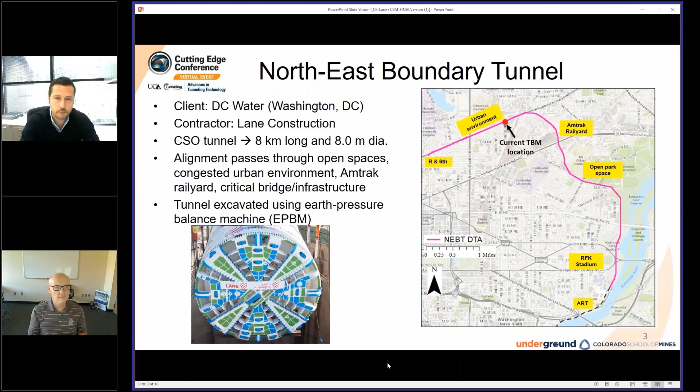Thank you, Karen. Good morning, everyone. Most of you are familiar with the Northeast Boundary Tunnel. The project is in Washington, D.C., and our client is DC Water Clean River. We are Lane Construction. We've been working with the Colorado School of Mines on the project of artificial intelligence applied to tunnel boring machines. And today we're going to talk about that.

This project is 8 kilometers long. You can see that the TBM currently is at 75% of its drive. We pass through some sensitive structures like Amtrak, CSX, WMATA, and other bridges. It is an EPB machine and has been doing the excavation for approximately the last 15 months.

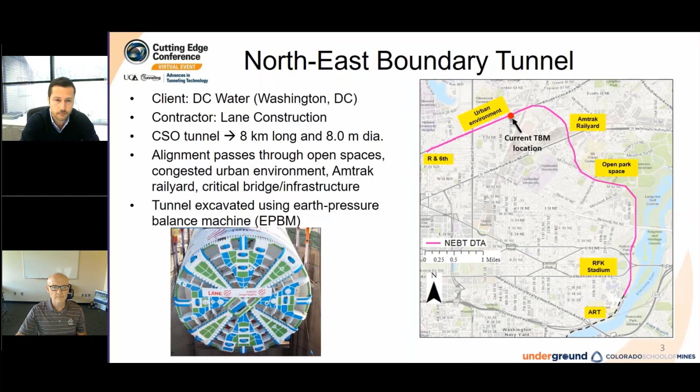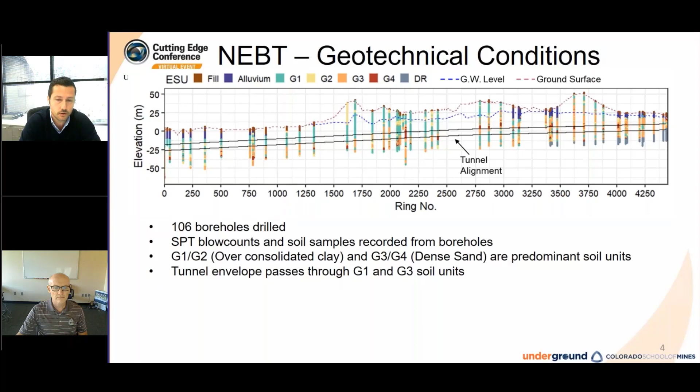Next slide, please. So the geotechnical condition of the alignment started with investigation pre-RFP, and the GBR was characterized by all these boreholes and the SPT blow counts and all the samples. But at the end of the day, we are simplifying things and saying that we are talking about two main soil groups: G1 and G2, which we can represent as over-consolidated clay, and G3 and G4, which we simplify by calling dense sand.

So most of the alignment, let's say 2/3 of it, is in those dense clays, and 1/3, which is what we are mining in right now, is in those sands. The sand is under pressurized water, we are encountering water, and therefore it's very important to apply pressure and to mine in a controlled way. Next slide.

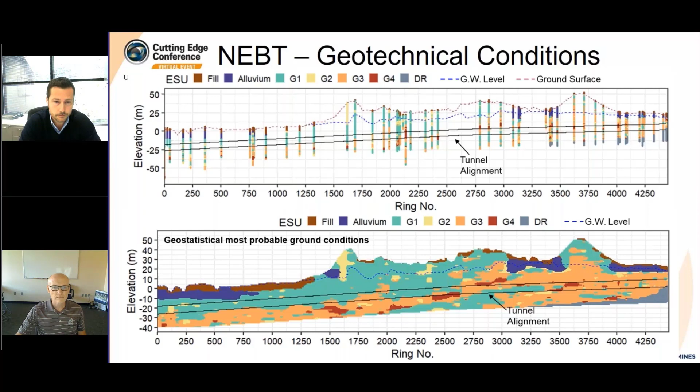So we started working with the Colorado School of Mines, and in our project of artificial intelligence, the first question that we asked ourselves is, what do we want to focus on? What are the bigger risks of the TBM that we want to model, control, and predict with this project? And the result of this discussion was, let's focus on the tool wear, because mechanical damage and potentially catastrophic damage on the TBM can be a very big issue.

So we want to try to have a model that is going to predict the tool wear and allow us to make a good decision where we need to do an intervention, when we have to anticipate an intervention or postpone an intervention if it's needed. At the end of the day, we want to avoid a bigger issue with a TBM stuck somewhere, or with a mechanical failure, or potentially having to have a rescue shaft in a place where we really don't want one. So that is something that we want to avoid.

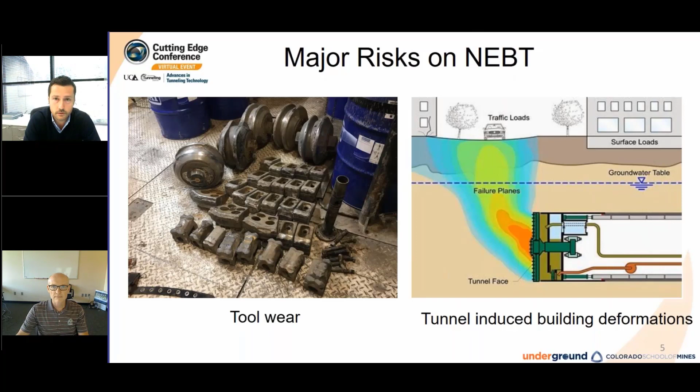And the second thing we're going to focus on is the settlement. Of course, creating settlement is something we don't want to do, and minimization of the settlement is one of the targets that we have here. So we're going to describe the model that we have implemented to try to predict that settlement. And with that, I'll turn it over to Mike, who is going to talk about these two items.

Thanks, Daniele. So we have applied AI successfully in tunneling. We applied this to the Seattle NorthLink Extension project in Seattle, of course, to detect and characterize the as-encountered ground by the TBM. As we all know, with EPB TBMs you cannot see the ground, and so you have to rely on looking at the muck to characterize the ground. We felt the TBM could act as a probe drill and that its performance is impacted, of course, by the ground. So why not use that data to essentially treat it as a sensing TBM?

So the way we did this was we trained an AI model using the TBM data and the borehole logs. The borehole logs exist prior to the excavation, and the TBM data is collected while excavating. So we train that model as we go, and then we predict the soil within the excavated envelope through which the tunnel boring machine moves.

So here you see the geological profile for the Seattle area, a lot of glacial soil, so very heterogeneous ground. The colors designate different soil units. And then you see the traverse of the alignment of the TBM. What you see here then is if we simply pull out the GBR estimated soil profile, this is what you see: clay, sand, silts throughout the alignment.

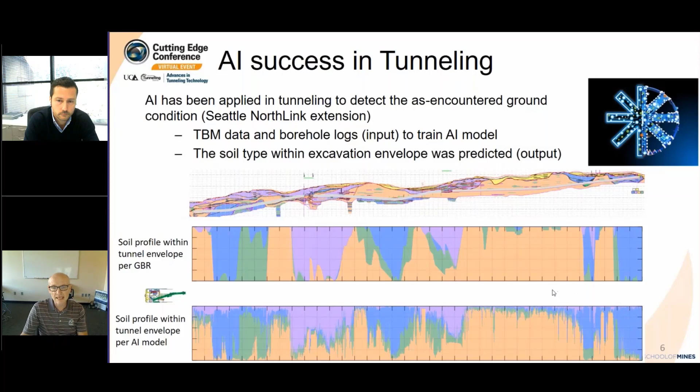So now if we turn our attention to tool wear, there's no continuous measurement of soft ground tool wear. There are disc cutter measurements, but that's hard rock tooling. There's none for rippers and scrapers. We simply don't have a technology yet that allows us to measure that. And as Daniele said, tool wear is quite critical. So we'd really like to get an estimate of what the rate of tool wear is.

So we only get measurements during these limited cutter head interventions, and cutter head interventions in soft ground, pressure balanced conditions in urban environments are a big expense and they're risky. And so they're very limited, and you try to avoid them if you don't have to do it.

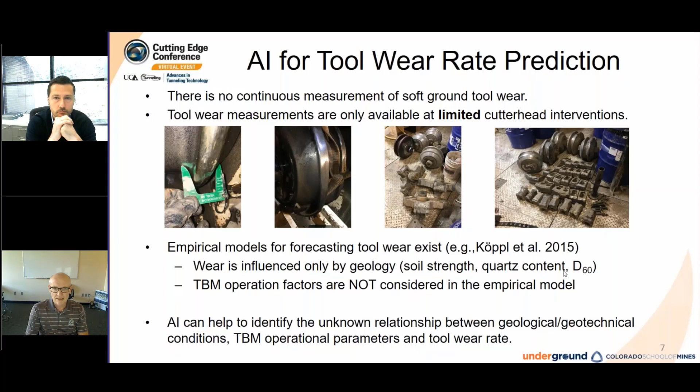There are empirical models for forecasting tool wear, but these models are predicting tool wear only based on geology, soil strength, quartz content, D60, which all leads to items like the soil abrasivity index. The TBM operating parameters are not considered in these prediction models. We believe they should be, but there's just lack of data to develop these models. So we felt that AI can help us identify these unknown relationships, specific to a project, between the geological and geotechnical conditions or parameters, the TBM operating parameters, and then the tool wear rate.

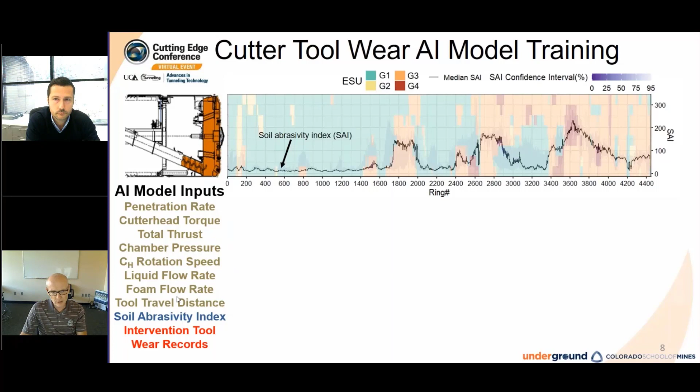So we take this now to train a model. We're going to use inputs from the TBM. So we use the penetration rate, the cutter head torque, the total thrust. These are parameters we believe have an influence on tool wear. And there's some other parameters shown there. We also take the soil abrasivity index and its variability, and we use intervention tool wear records to train the model.

So you see now in red, we have intervention tool records, I1 through I7, as shown on here. Project is somewhere up here where my mouse is. And so you see that these are very sparse interventions, but for each one of these interventions, we have a record of observed wear. So on the bottom here, you see with a picture of the cutter head, the 8 ripper tools that are monitored. And then in the box here, you see the observed wear.

So for example, tool 1 is shown over here with 50% wear. That tool then gets replaced because it has 50% wear. And you see in this particular intervention number 7, all of the tools exhibited 50 to 60% wear and were replaced. And 50% wear, for point of reference, is about ½ an inch or 12 millimeters of wear. So with this data, we trained the model.

I'm going to walk you through one example where we train the model over all the data up through intervention 6. That includes all the geotechnical data, soil abrasivity index, as measured TBM parameters, and intervention data. And then we're going to predict the tool wear beginning from after intervention 6 through intervention 7 and compare with the results.

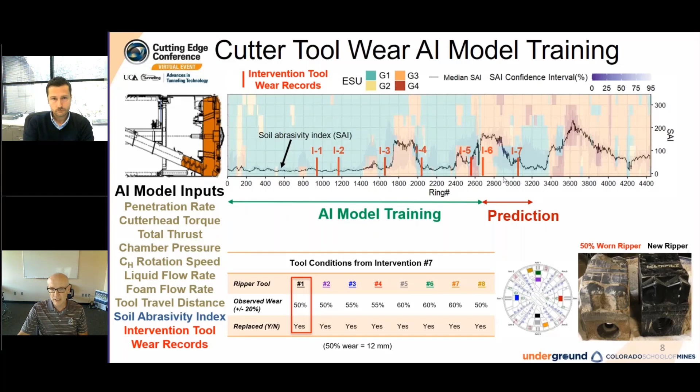I'm just going to jump back here and show that. So between I6 and I7, you see now the TBM is almost fully in the more abrasive sandy soils, whereas prior to that, it was in mostly fine grain. So the model's being trained on a lot of fine grain data. There were some areas where it was experiencing coarse grained soil. We felt like maybe that would be captured adequately between I3 and I4, for example. But as it turns out, it wasn't sufficient enough. So that's one reason for the differentiation.

TBM parameters were also different, specifically higher thrust on the TBM, higher torque on the TBM between I6 and I7, and its influence on wear was not adequately being captured by the model because it hadn't encountered that ground. So one important lesson from these models is they're only as good as the data. They cannot predict outside the range of the data.

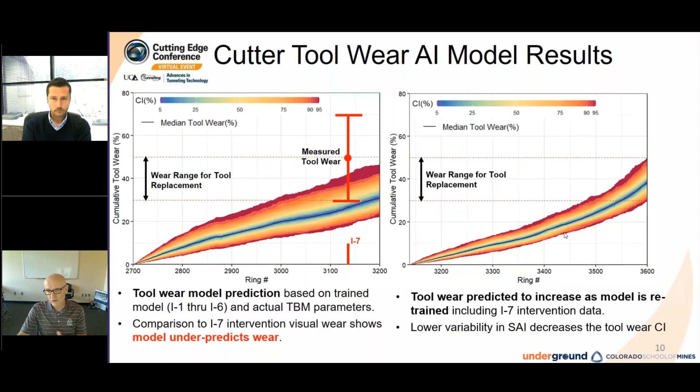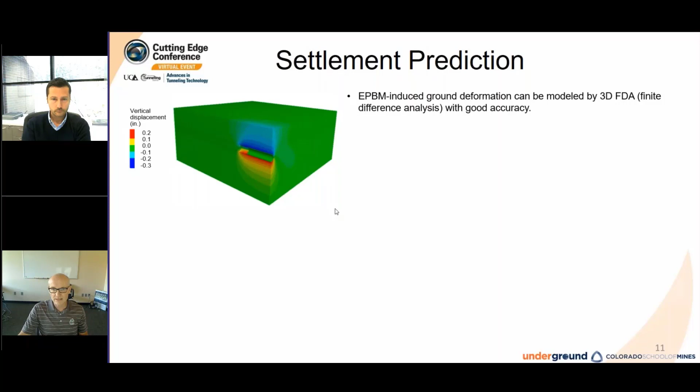All right, switching gears now to prediction of settlement. So the TBM-induced ground deformation can be modeled by three-dimensional computational modeling, finite element or finite difference analysis, with good accuracy. So here you see a simulation of this step-by-step modeling of deformation. We actually introduce into the computational modeling the TBM parameters. So there are face pressures, there are grout pressures that are specified along stretches of the project. Those are critically important to predicting the correct greenfield deformation, so we input those.

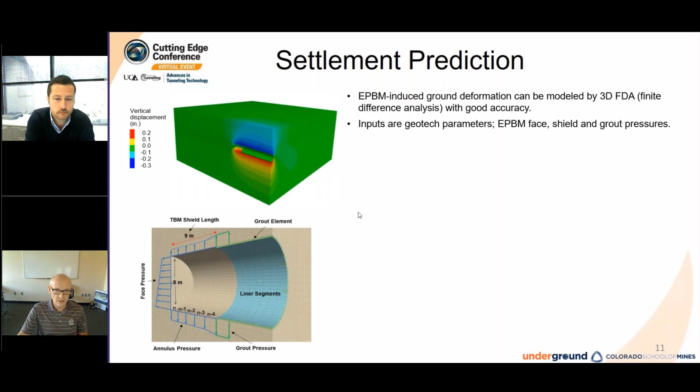And we found on the project that we have matched the observed greenfield surface displacement profiles quite well using this computational model. So here you see a lot of great instrumentation and data points for greenfield ground deformation. And if you look over here on the right, you see the measured surface settlements and predicted surface settlements line up pretty well on a one-to-one line, which tells us we're modeling accurately using this 3D model.

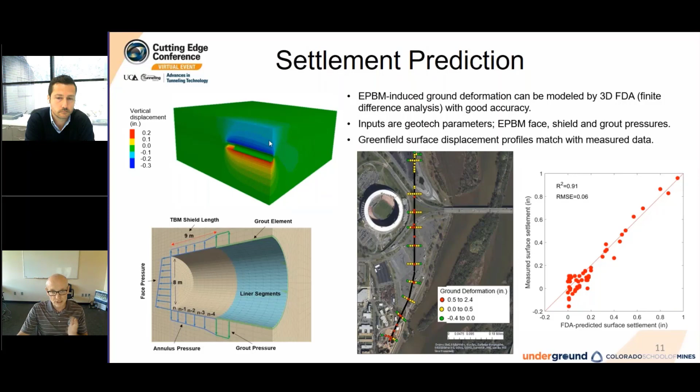But here's the problem. 3D modeling is complicated and computationally expensive. It takes 2 hours for a single run. So this makes the process of predicting ahead or predicting in real time using construction timescales difficult. The whole point of this is to use this as a risk mitigation tool, to be able to predict the next ring, to predict the next shift. And so we need something quicker.

So the strategy here was let's train an AI settlement prediction model using all of the simulations. And if the simulations are accurate based on our ground truthing with actual data, then we could feel confident in our AI model. So we trained the AI model using hundreds of simulations, varying geology that we anticipated on the project from the data, varying geotechnical parameters, and varying TBM parameters, specifically face pressure and grout pressure. So we have lots of input. In fact, we have 16 input variables into 800 of these simulations.

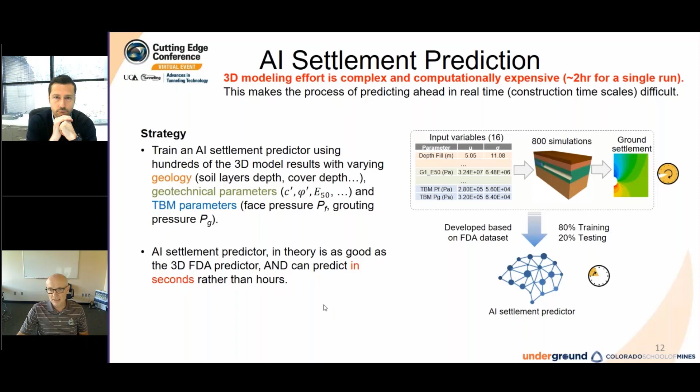We ran these on weekends, we ran these at nights, lots of grad students, lots of processors on computers, but completely off of the critical path of the tunnel project. So it just churns away and produces all of the ground settlement data we need to then train this AI prediction model. So in theory, the settlement predictor is as good as the computational model, and it can predict in seconds now. Now we've got a tool that, if given inputs, can predict what the settlement will be in seconds instead of hours. So the AI model shows similar capability as the computational model in successfully predicting ground settlement.

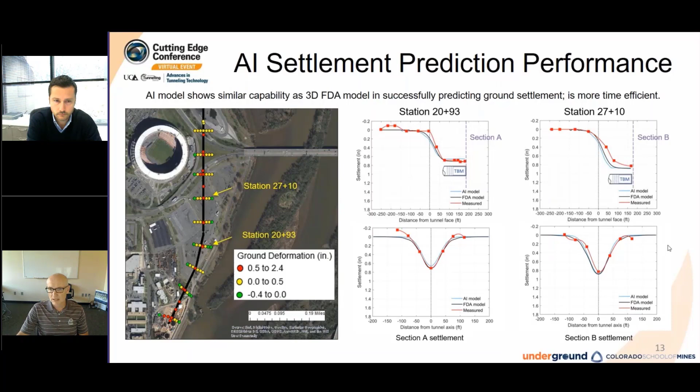Again, there's variability in these estimates because the ground conditions are variable and we don't have certainty in what they are. And the TBM parameters are variable too, and there could be operator error. We want to capture potential operator error. So what this shows is the max settlement can vary. With 95% confidence, we can say the max settlement will not exceed 1/2 of an inch. So that's good information to have. We can't say if it's going to be 0 versus 1/2 an inch, but we can say with 95% confidence it's going to be at most 0.5 inches.

So finally, though, limitations with this approach: these are greenfield ground deformations.

These are not structural deformations. So we have lots of training data on greenfield conditions. In order to develop an AI type model for structures, you need lots of different types of structural deformation, different types of structures and data. So that's much more challenging. However, we all understand that buildings are, for the most part, stiffer than the ground, and so deformations of the buildings will be less than the greenfield. So there's still a lot of value in that.

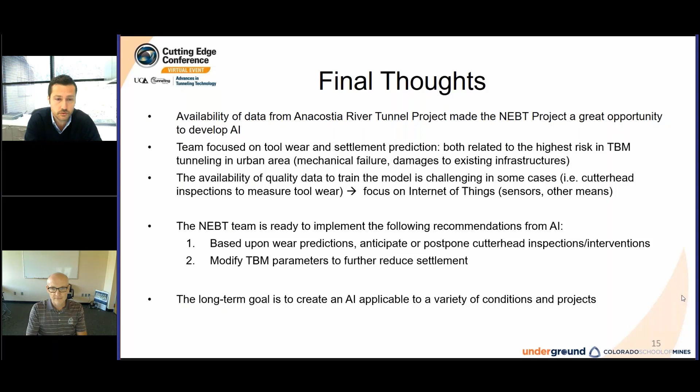And I think we can focus on trying to anticipate or postpone interventions and improve our quality and our productivity as well. The second part, which is related to the settlement, we can look at the consideration and the suggestions from AI and decide if we want to change some parameters to even further reduce our settlement. As of now, the machine is proceeding with very little settlement. There will be a presentation during this conference with a colleague of ours that is going to describe a little bit. But generally speaking, we are pretty happy.

And in conclusion, I want to say that it's not only about predicting and focusing on one project. The importance of creating this model is also related to capturing some of the data that in the future we'll be able to train more and more models and make it more universal, more applicable to different contexts as well.